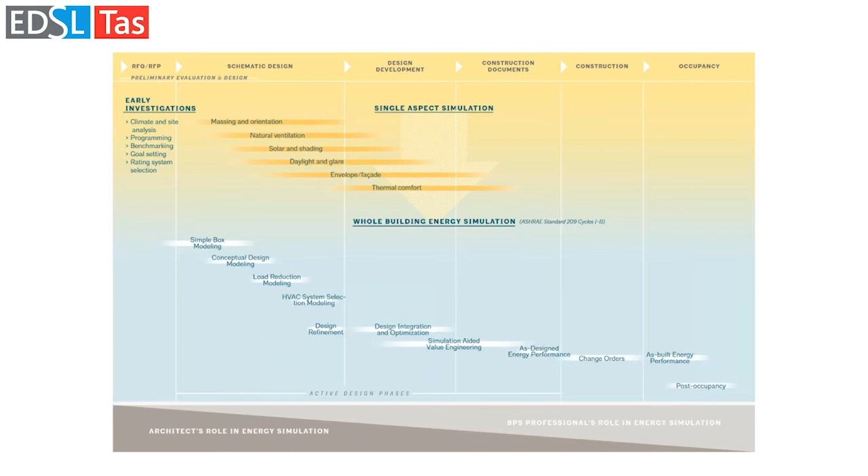But then if you take a look down the bottom, everything that's in blue - this is actually, and you might, if you can read the fine print, great, if you can't, that's okay - but next to the title, Whole Building Energy Simulation, they actually reference the ASHRAE 209 standard. So this graph basically does its best in a nice visual way, thanks to the AIA, to map certain aspects of building energy modeling to different points throughout the design lifecycle.

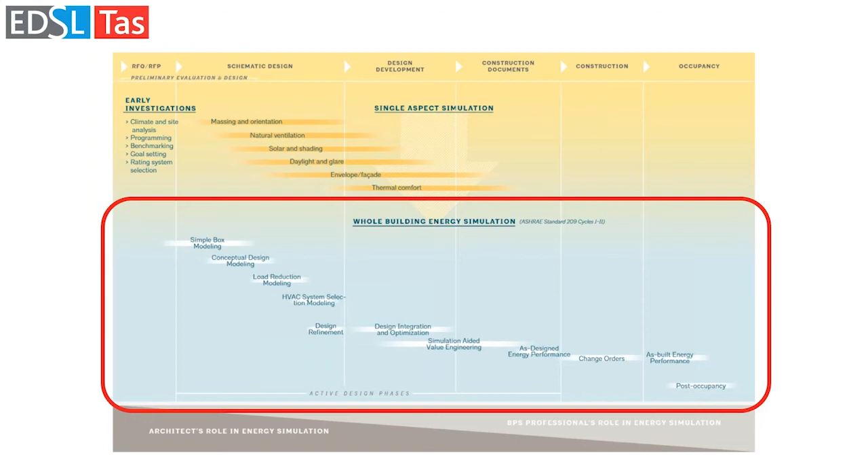So I found this a little difficult to read, so we made a simpler version of this. Hopefully we can just go through it. As you can see, the column on the left takes you down through the design cycles. And then sort of the lighter shade blue are aspects that we'll be talking about as it relates to Tas and how you can accomplish each of those in our software Tas.

So we've got, for conceptual design, or RFP, RFQ, we've got something called simple box modeling, and then conceptual design modeling. Michael will be happy to go through those.

And then in schematic design, load reduction modeling, which is basically where you're trying to find ways and design strategies to reduce the heating or cooling loads or energy loads on the building itself. So if you can prevent the energy from being used in the first place. And then also some very schematic system selections to try to figure out how you might develop your design around different active and passive strategies for the building itself.

Then in design development, much like the architectural cycle, you begin to do the refinement of that design. You begin to sharpen the pencil a little bit, provide a little bit more data, go through some iterations, and then you begin to integrate your systems and optimize, let's say, the sort of the template-based systems to the specific building uses.

In construction documents, the 209 standard calls out for simulation-aided value engineering. So inevitably, someone's going to think something costs too much money and is going to ask to see if substitutions can be made. So there's a section in the standard that covers what sort of energy modeling might be suitable for the value engineering process.

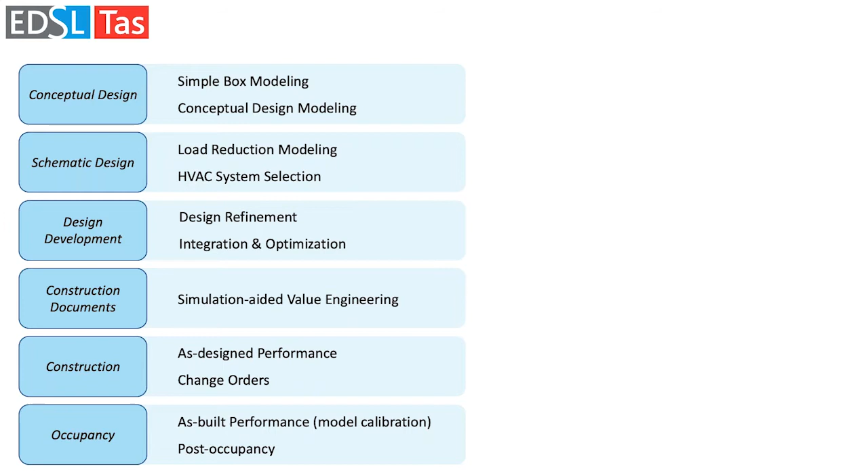So that's a very quick 50,000-foot view of the types of energy analysis that are used throughout the design and occupancy life cycle. And I'm going to hand it over to my colleague, Michael, at this moment, so he can begin to talk about the first phase, conceptual design, and what's required within it. So thank you, Michael.

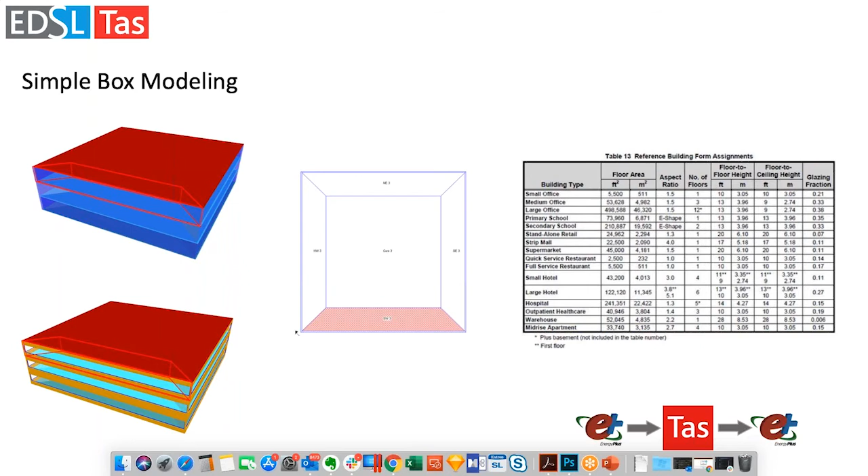So then basically building up into schematic conceptual design, where maybe you don't know the final shape of a building yet, but you know the space types you're going to have to analyze, and you want to see how those exposures, different orientations, perform with different considerations. So this is looking at different sun angles for solar and sunlight exposure, and also daylighting analysis.

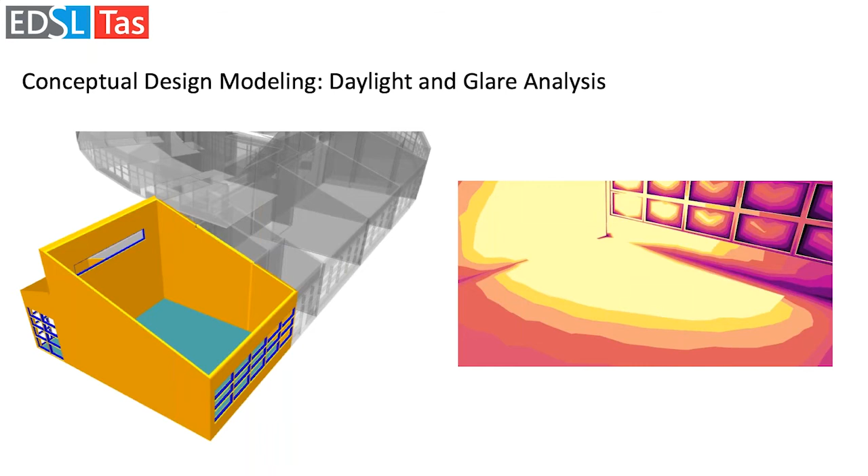Mixed in with natural ventilation, so we have daylight being analyzed for this particular array of windows that have been applied. That could be changed back and forth as you iterate between the daylighting and the impact of different window configurations, different operable windows, maybe having only the top row openable, just playing around with one room in a particular building, moving on from the one zone building in the simple box modeling type analysis.

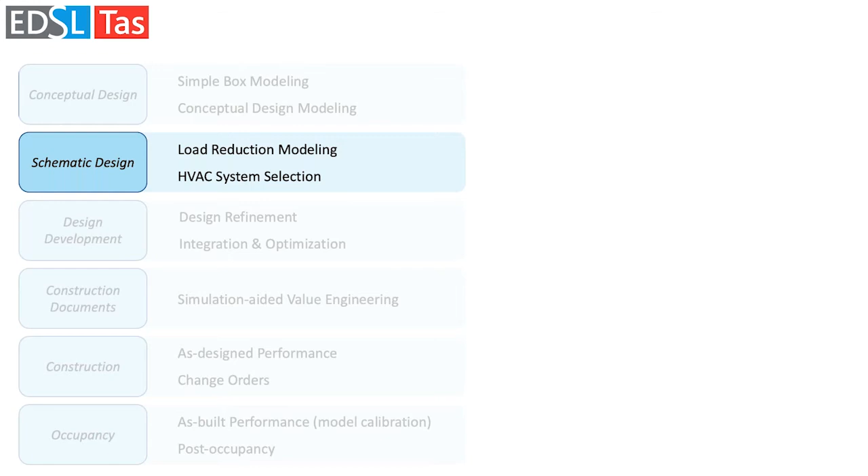So once you get out of the conceptual design phase - and I'm skipping through that quite quick - you would have several iterations going through different ways of analyzing the building, different aspects of it, single aspect, whole building aspects. You may go into load reduction modeling, where you could look at more refined building forms.

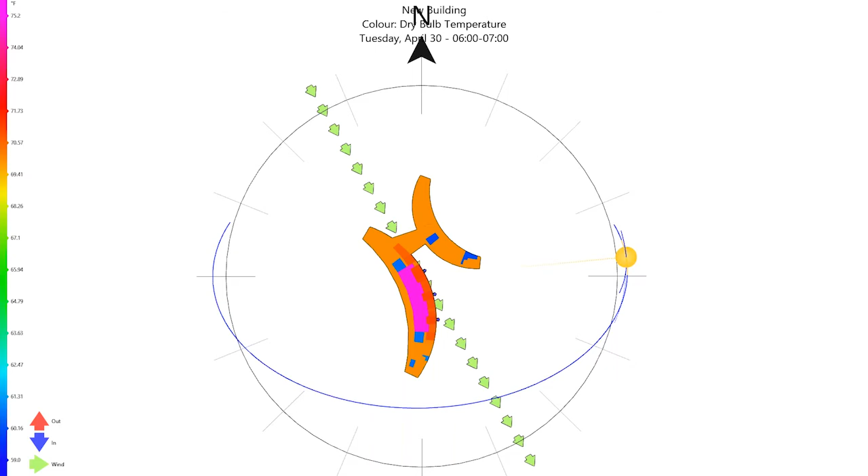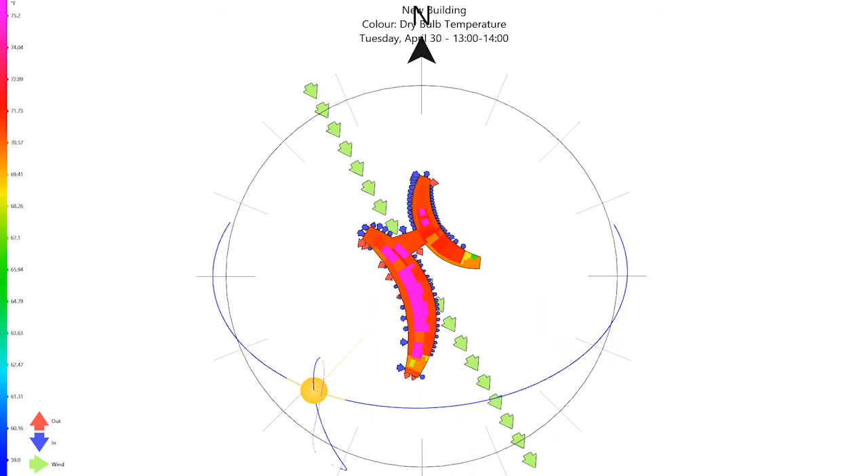This is one story building, all the zones being analyzed, and in this case just for the temperature as it pertains to responding to the natural ventilation. So you see the wind direction changing with the green arrows, and response of all the apertures with the blue arrows of the cold air going in, and the red arrows with the warm air coming out for the building.

Through the course of a typical day. So this type of analysis can be performed at a simple level of detail, building up to more levels of detail in the same type of thing, where you're trying to look at load reduction.

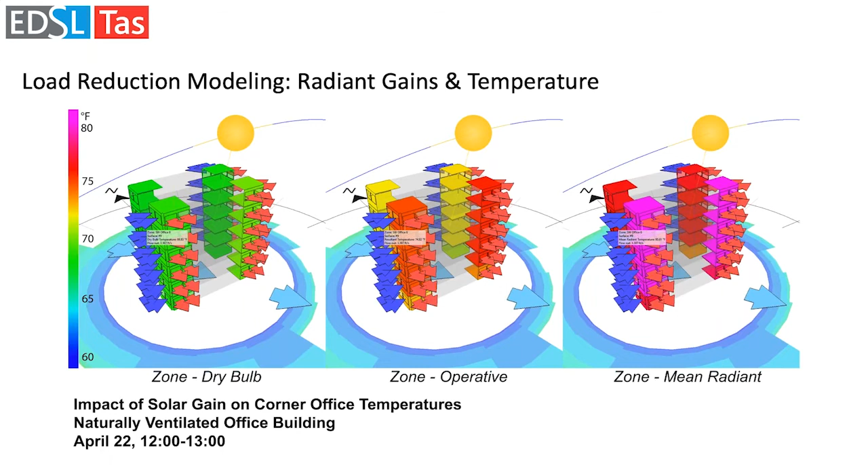So this is just to show maybe natural ventilation schemes are working at one level of detail, but then when we build in a bit more, we find out if we're not considering shading for naturally ventilated spaces, we're still maybe producing uncomfortable spaces. And again, all this is just doing passive analysis at schematic design. And when you've defined shading schemes for your building that work for solar and natural ventilation, then you consider the internal light implications of that.

So there's some ray tracing simulations that are possible in TAS to do these interior shadow simulations.

Building up to larger projects, but maybe just a typical floor, changing glass types for the facade impacts what's on the lower right-hand side. You can basically see the solar gain through the year hourly, and you can see one glass is controlling the solar very much, the other one's letting a ton in. That impact is yes, the cooling goes up in the summer, the heating goes down in the winter, and the central one is the sensible load - heating's above the zero, the zero's here, and cooling is below zero. You can see there's a much larger cooling amount from the higher solar gain.

However, with natural ventilation being allowed to use in the occupied apartments, you're also increasing the amount of hours where zero heating or cooling is needed in the periods before and after summer. This particular project being in Toronto, it was cold - a cold climate anyway, and the system for cooling efficiencies were much better than the heating, so it can balance out.

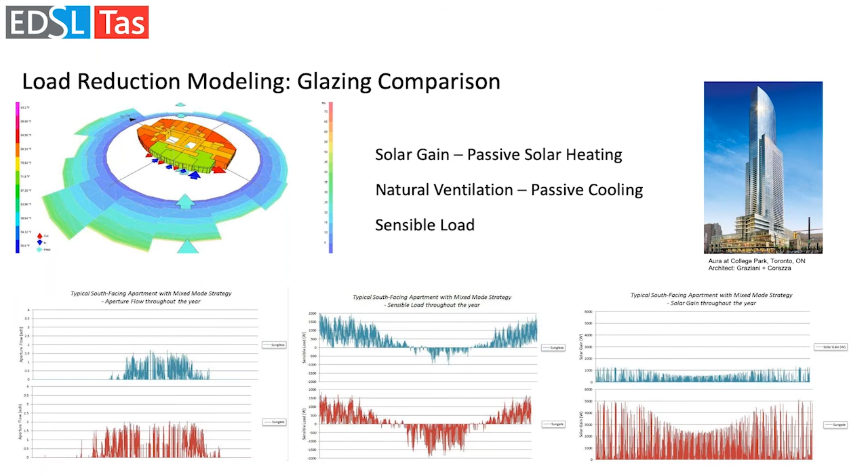But again, this is as you're working through the design options for a project, analyzing how you can reduce those loads. Another thing after doing early concept daylighting model analysis is being able to integrate that into lighting controls, so doing daylight dimming. You can see here, this is the interior lighting load for this office - the weekends are the gaps - and you can see how that dips down for all the zones in the building at different levels through the year with that daylighting control.

And it saves - basically this block would be filled in without the dimming control - and that reduces the internal heat in the space, which allows then some more hours where you're going to hit zero sensible load, so no heating or cooling required, as shown in this little area here, zoomed in.

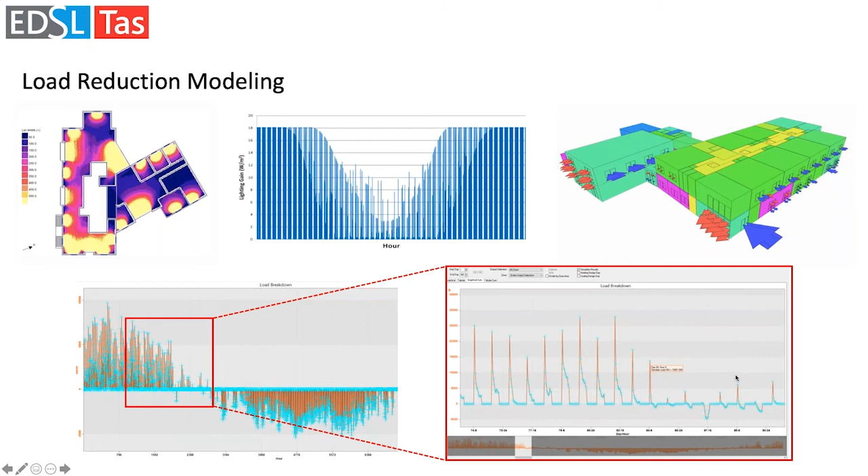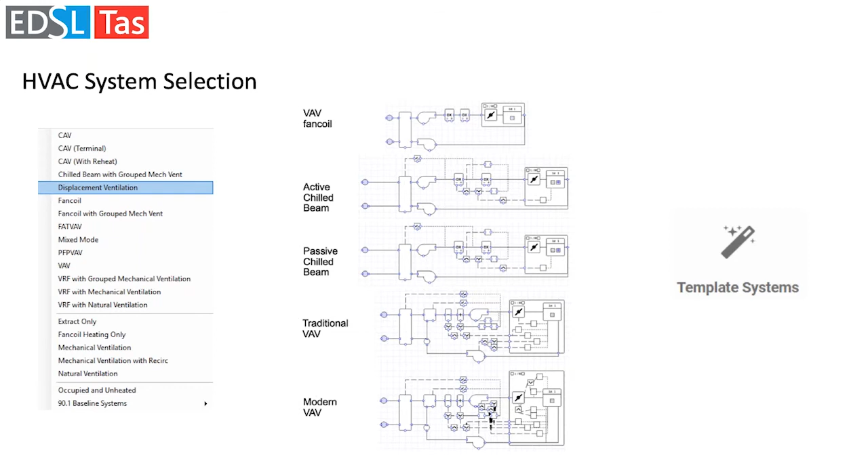The next part in this modeling cycle focuses on basically templatized HVAC system selection. So you're not really drilling down into all the setup of those - you're using typical setups, but maybe changing out different types of systems to analyze. There's a bunch of templates in TAS that you can pick from, shown on the left, and all of the baseline systems from 90.1. The idea is you just pick the type of system, apply it to a certain subset of thermal zones in your model, run it, see how it performs, and compare that to other systems analyzed.

As we move to the next cycle in design development - design refinement, integration, and optimization - here there's more of a solid idea of the geometry and shape of the building, but you're really just refining all the parts and pieces that make up the geometry further, when you've taken those smaller concept models and applying them at a larger scale in the model.

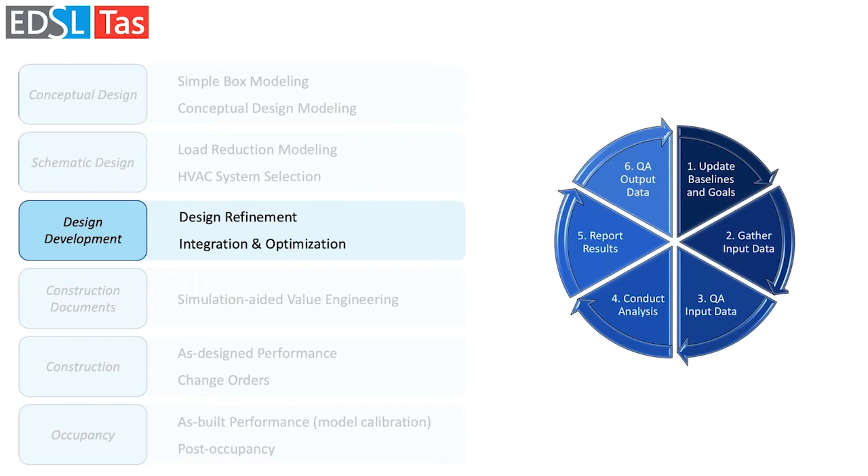Here moving to show one floor plan from that building being analyzed instead of just a couple of rooms for daylight, moving up to a climate-based daylight modeling approach where multiple hours through the year are analyzed. We do analyze the whole year when we do CBDM analysis, and in this case we even reduce the grid spacing to 10 centimeters, or a third of a foot square - much less than is needed for LEED - just to get a super granular grid to see what was going on, and also to test the software out for its performance. But again, this is just so you can review that in the context of an entire floor for the project.

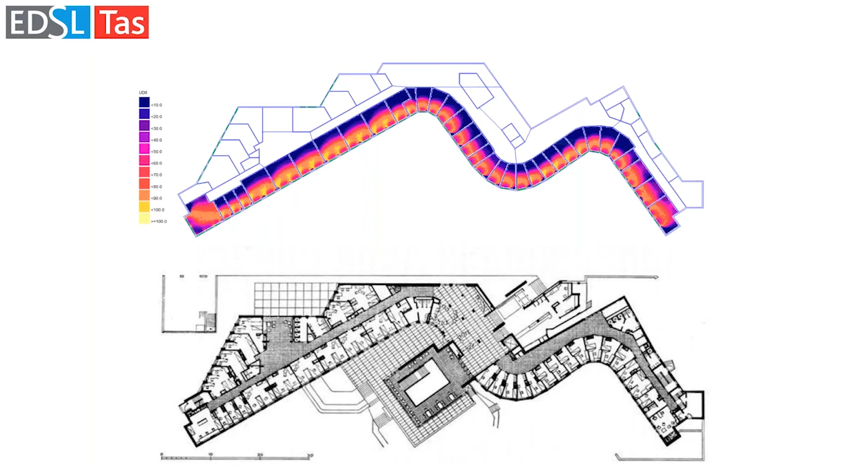Annual insolation, so looking at the solar gains on the whole building form - in this case just selecting those dorm rooms, the same ones that were analyzed for daylighting - picking a subset of the spaces to test how the shape of the building is impacted by solar, and then seeing the convex piece, the part pointing towards the sun, how that's getting hit. You can basically in TAS mouse over any of these surfaces and get the data reported back for the actual annual insolation for that surface. So it's interrogatable data.

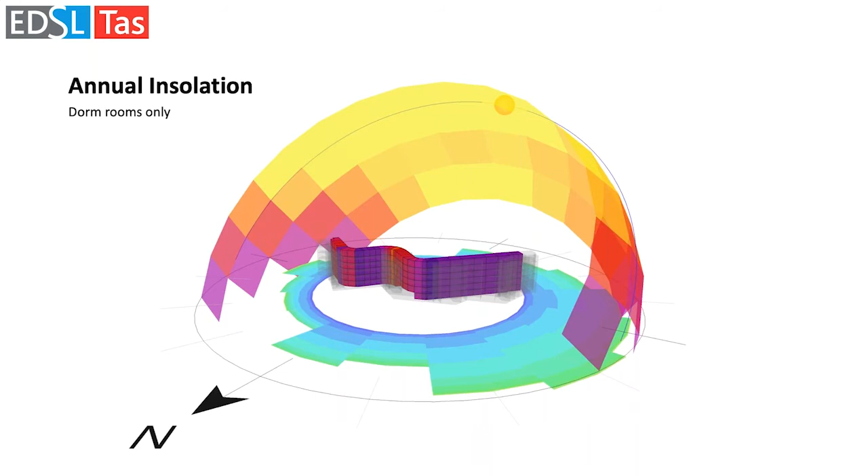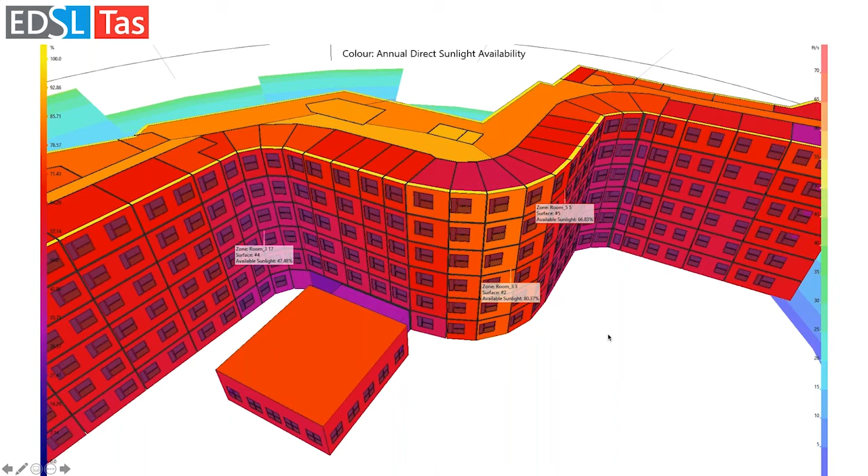And again, taking natural ventilation as a concept of analysis, applying it to the whole model could be useful, but also before doing that, maybe picking a subset of rooms to analyze different orientations for natural ventilation, to check how it works at different times of day and different times of year. So this is looking at 27th of April, 9 a.m. and 1 p.m. In the morning, it actually still maintains comfortable temperatures for these different orientations, but by noon, when the sun's really up, the high exposure bit with solar and annual insolation was very high, is basically too hot. There's no air conditioning in these rooms in this particular building that was finished - they'd had to put HVAC units on it if the students in this building were still there by 1 o'clock, if people recognize it.

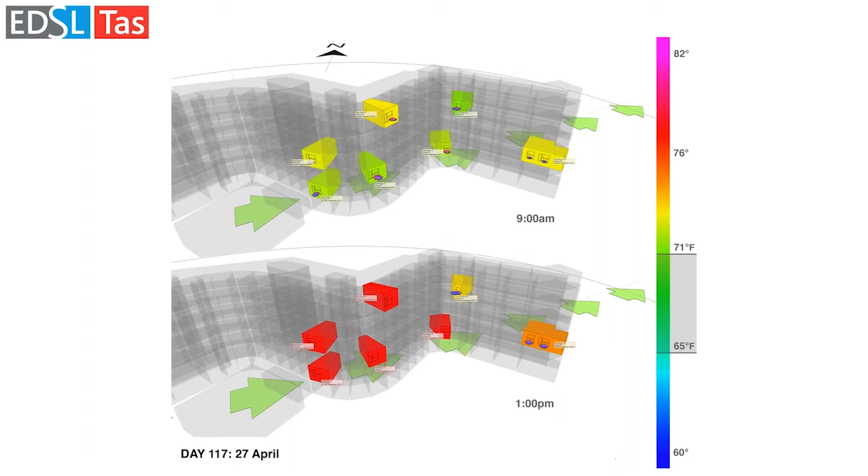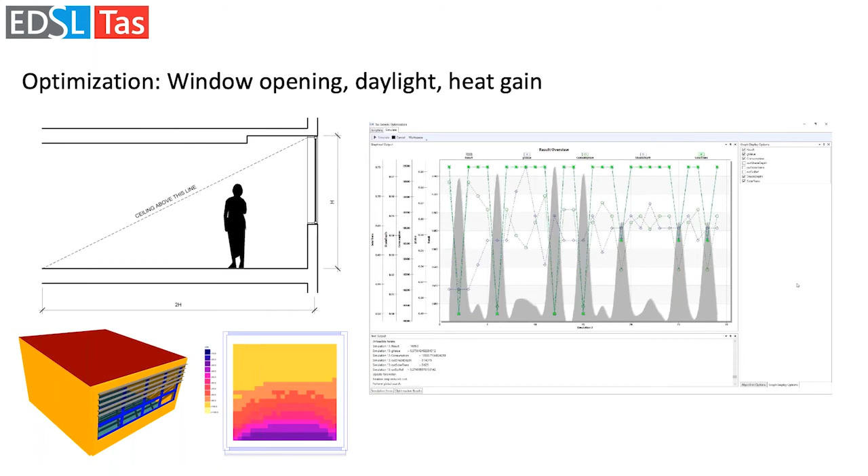After doing that, just analyzing things, optimizing. So when you can't find a clear solution for many things in building simulation, because lots of variables overlap and result in different outcomes, optimization can help when you want to basically take a few things like shading and daylighting, calculate maximizing daylight availability, minimizing peak cooling load, and this is basically running a series of options.

You see that the gray shaded area is the result of this analysis, and the idea is to minimize that down to as small an impact as possible. And you can see basically it starts changing variably through the first half of the analysis, and then it kind of settles down into a particular result space.

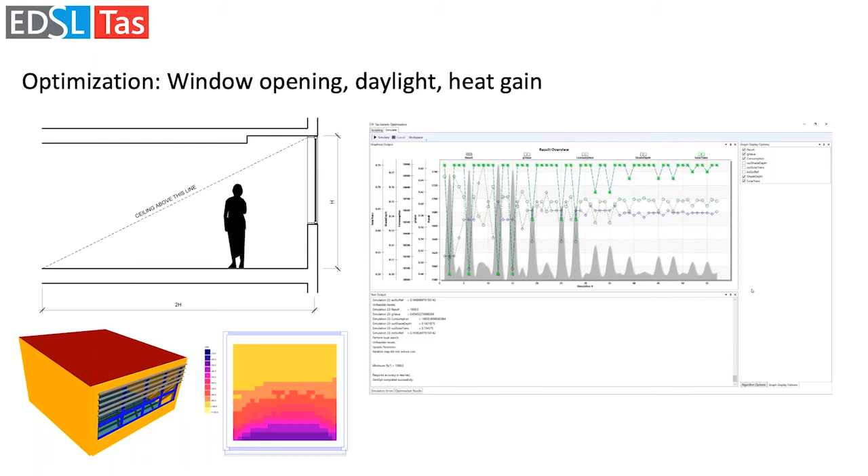And there's a series of algorithms available in our optimization piece that came from LBNL's GenOpt tool that we basically created a C# scripting interface for in TAS that allows you to run these generic optimization and parametric analysis types with. So we looked earlier at that dry bulb versus mean radiant temperature and operative temperature with the passive side of things, with natural ventilation, solar, and potentially solar shading.

You can also analyze active radiant options in TAS. So here's modeling of an underfloor heating and cooling system. And once you do this, you could, just like the NatVent, spot check a few rooms before applying it to the whole building to see how that performs as you're doing the design. So here we could check things like the surface temperature of the floor, as well as the air temperature.

So floor surface temperature is labeled up here, the air temperature dry bulb here, and the operative temperature of what the occupant feels down here. So you can see the underfloor cooling is actually bringing the temperature felt by the occupants much lower, and then potentially using less energy to do so.

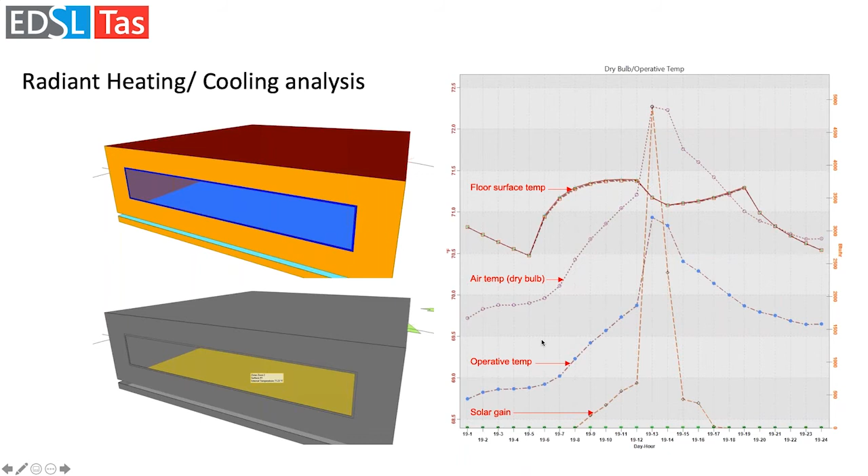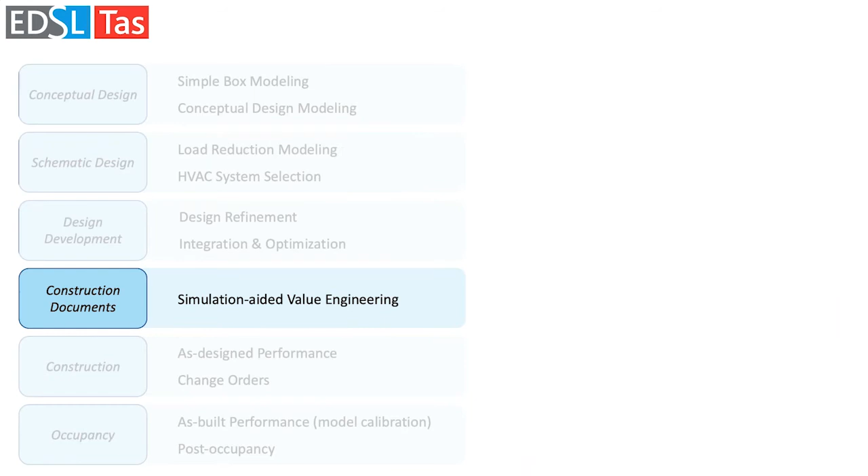This goes into the murky area of simulation aided value engineering, where something costs too much, so we're going to make some changes. But the 209 book, the simplified version, asks you to assess the implications of those changes through modeling. So say you spec a particular mechanical system for a building, and it was considered too expensive, so you could change it out.

So here, the generic systems were analyzed, passive and active beam. Maybe one of the systems came up too expensive, but by picking something more specific and running that analysis, you could see the impact was going to be more cost effective in the upfront cost of the system, but also maybe saving some energy overall. And again, this is comparing those template systems with more refined detail as we get into the completed project design documentation.

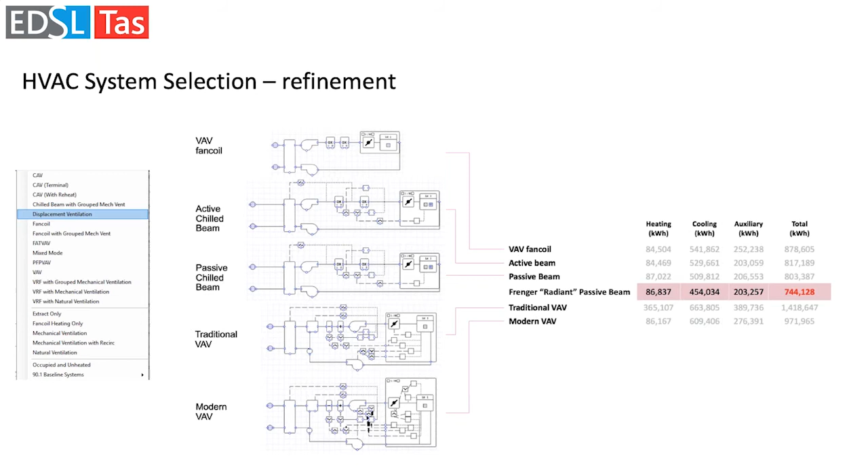As you get into construction as design performance, the piece I'm going to highlight here is actually to do with 90.1, as Bob alluded to earlier. I'm going to talk about this for a little bit. ASHRAE 90.1 Appendix G is a compliance path for the standard from 2016 onwards, and has always been part of LEED as well. And since 2007, we've had a studio that's been added to over the years to automate the process.

Basically, this means that we take the proposed as-design model files and generate all the baselines. That can be the geometry files, the simulation files, and the HVAC files to do all the simulations for you. So you end up with all the model data and the average baseline against proposed results all created for you.

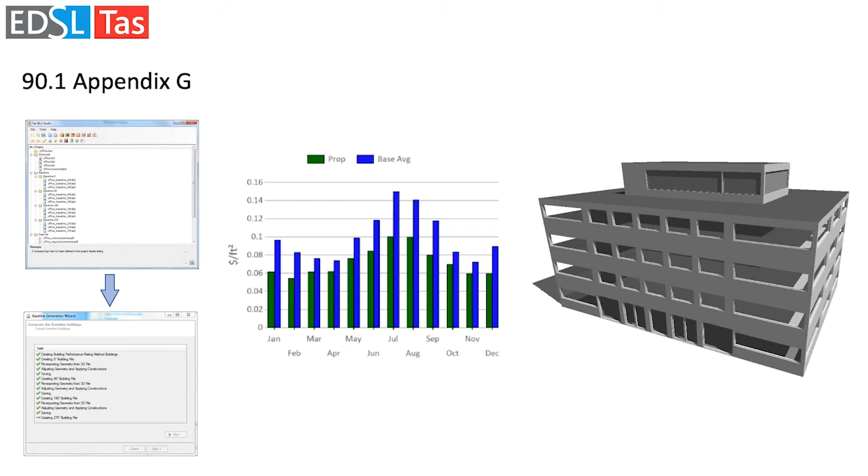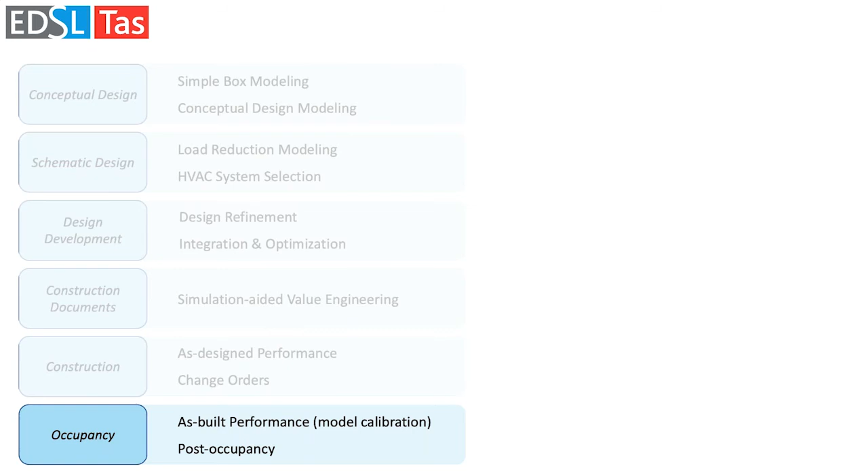And then moving on from that into the post-occupancy and model calibration phase for the as-built. So reassessing what the commissioned building space ended up being. If there were any change orders not assessed or value engineered, this is where you can go back and reassess the as-built performance.

This example I have to run through goes a little beyond what's needed in the standard because it was a research project, which meant that it got access to more data than you would ever typically get on a project, such as the ability to not just use a more up-to-date weather file for the location, but actually install a weather station on the roof of the project and record the weather data for 2 years and use that to drive the analysis.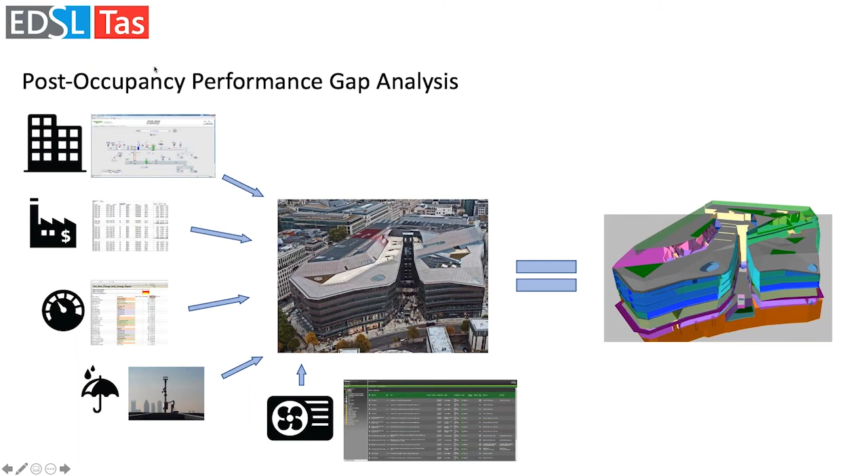Having manufacturer's equipment data available for all of the equipment installed and putting that into the model, getting sub-metering data for the spaces, full access to the utility bills, and even the BAS system, BMS systems, and all the data from sensors as the building was under operation, to basically create a calibrated energy model to do the post-occupancy performance gap analysis.

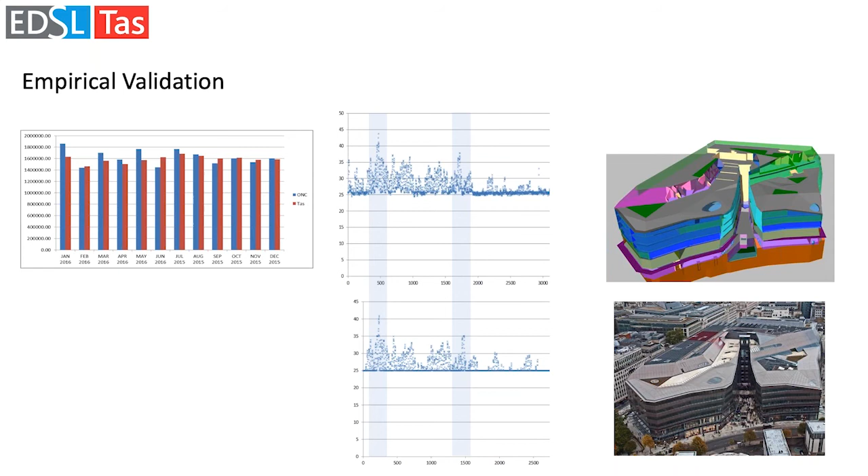There was a series of measures implemented on this project that led to many savings. It was 150,000, I believe, a year saved on the project every year afterwards. And also part of that was actually just improving comfort of the 4 stories of office spaces that make up the top of the building with regards to humidity controls in the space.

Another part of post-occupancy goes into equipment replacement and feasibility for retrofits. So in New York City, there's Local Law 97, which is going to start having people report their CO2 emissions. So there'll be many more of these projects popping up. This is just an example of taking one example building with measured data, creating a calibrated model to that, not as much detail as the past example.

So it's calibrated as much as we can with the data available, and then basically making changes to the mechanical system, updating that, knowing the upfront cost to make that change, and trying to see what the predicted savings could be for that new system to see if it's worthwhile to do, to get them on track for where they need to go for the law as it progresses through the next 10 or 15 years.

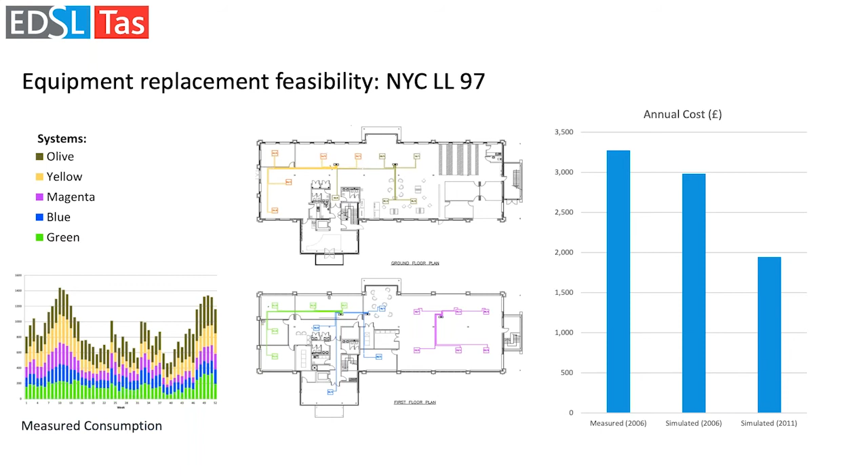Okay, so that was a brief bit about some of the cycles, some of the levels of detail in the cycles, and different types of analysis that you can do. Definitely not exhaustive, but I want to get into a little bit about TAS itself with some of the time we have. So what does it do? All the things that we've shown previously in the slides: whole building simulation, daylighting, natural ventilation, load calculations, HVAC sizing, and those 4 sub-categories all fit into whole building simulation as well.

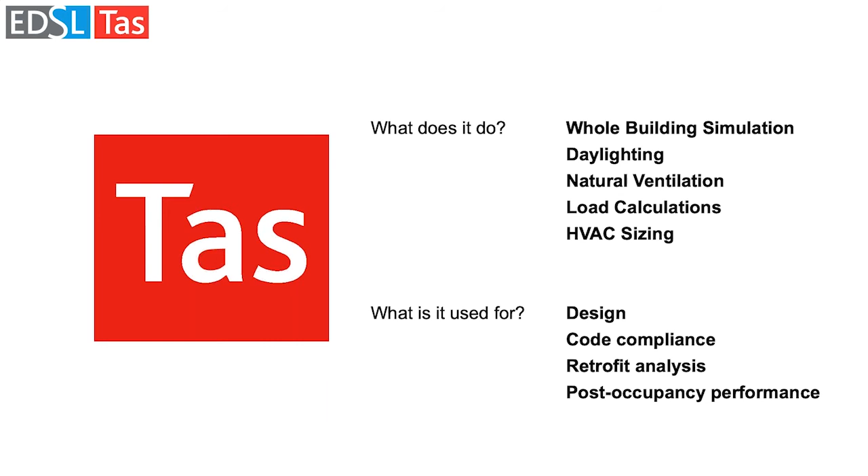What is it used for? Anything from design, analysis, code compliance, retrofit, and post-occupancy performance. So the full spectrum of the building's life cycle. TAS can be used to meet building simulation for those phases.

So how is TAS constructed? This is the typical workflow in TAS. You have a 3D model application that allows geometry creation and daylighting analysis to be performed. So all of the daylighting graphics shown previously came from our 3D modeling application. That also does shading calculations, which can be distributed among multiple cores and multiple machines. So you can basically create a little swarm of machines to do shading calculations to speed that up.

The building simulator allows you to put all the rest of the building input information, occupancy profiles, the lighting controls, aperture types for natural ventilation, all the passive simulation and shading options get put into here. You basically simulate the building loads, and then that goes into the results viewer where you get to review that data in a lightweight results viewer program,

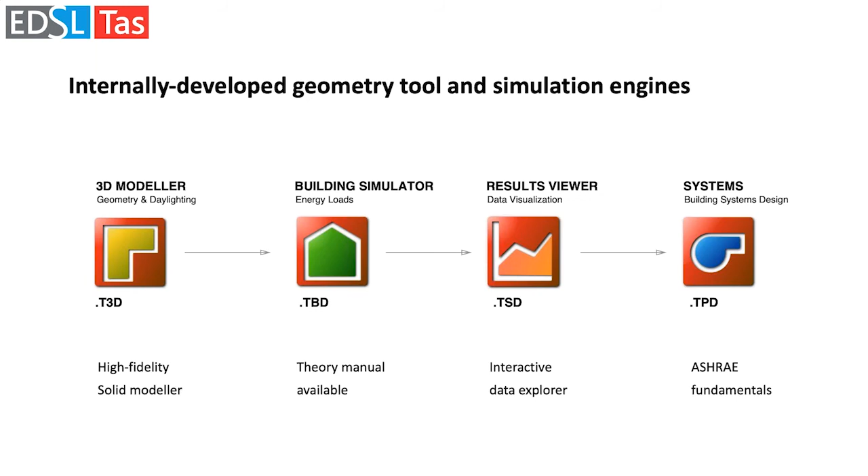which in turn feeds into the HVAC program where you get to use those template HVAC schematics, or even customize your own and build up as it's component based. You can build up schematics for whatever you would like on the air side and the water side, or refrigerants, VRF, and customize that as needed to do the HVAC whole building simulation to calculate the overall energy, EUIs, cost, and CO2 emissions for the building.

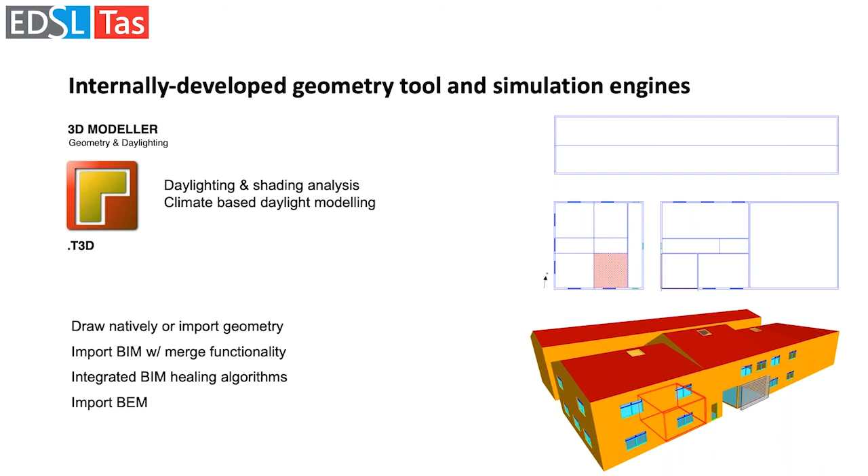So 3D modeler, you can draw or import geometry. Has import and merge functionality with BIM, so you can import a file once and then import a second file that's been updated and retain changes that you've made, but also update any additions that have happened. And there's ways to import BEM files as well.

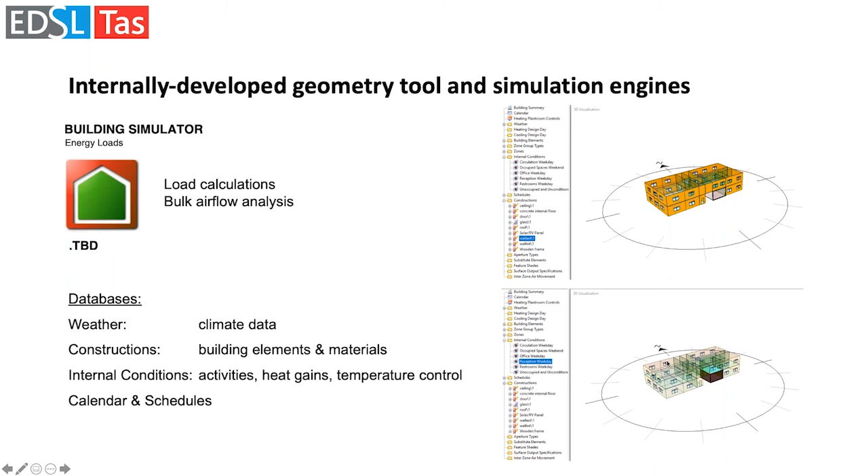Activities, so defining how many people are in an office space versus how many people are in a corridor, and again, these are the activities that are set up in the building simulation. When you select those, you can also see where they've been applied in the model at the same time.

TAS systems allows you to build up schematics for the plant room and the airside by component, or using those templates. So again, here's like a template fan coil system. It has live data that you can see on the schematic as well as psychrometric chart data, and there's data behind every single component. Every pipe and duct has all the 8,760 values for all the variables that it stores available.

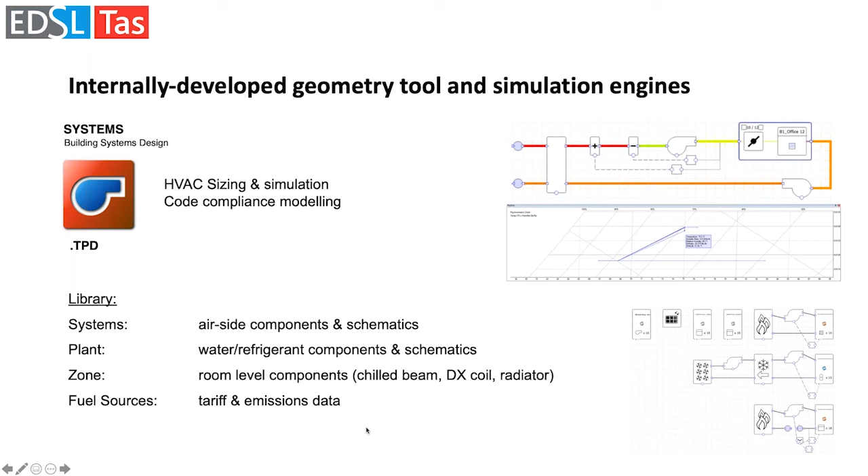And all these parts and pieces can be saved and reused in other projects into a library of things, as well as creating new fuel sources. We have a bunch of templates in there as well for those. You can create new fuel sources with new CO2 emissions factors and all the data necessary to define the tariff situation for the project.

So flexible workflows with Tas. Tas is a standalone application that, as you go through that typical workflow, can meet the needs of most projects. But it's not always the whole part of anyone's story. There's always something that goes on before and something that goes on afterwards.

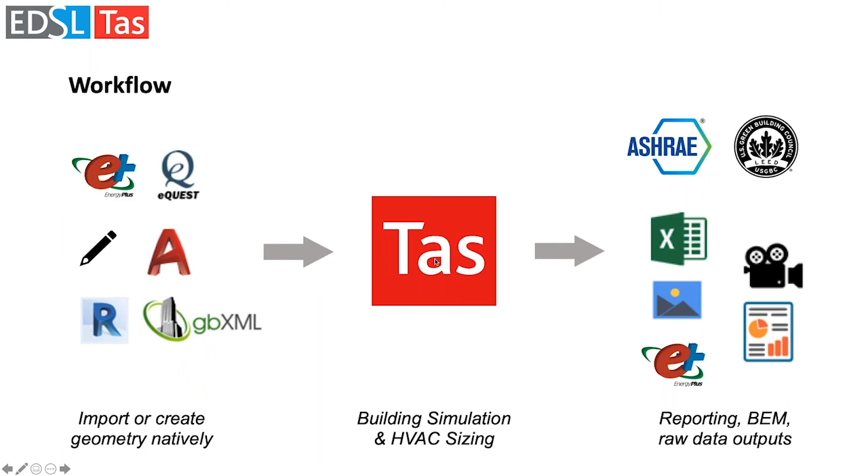There's lots of ways of getting data in and out, whether that's from just tracing CAD files to create the geometry, importing gbXML from Revit or ArchiCAD or any other gbXML authoring tool. There's ways into Tas, and then ways out. Always get Excel data in or out of Tas, video animations, images, customized and template reports. And we also have a BEM interoperability link with EnergyPlus. You can see EnergyPlus data going in and out. And we also take eQuest data in as well.

So with interoperability, I touched on it at the start. It does allow the ability to read and write EnergyPlus data from Tas, which can help communication gaps across teams. And also just exploring options within Tas in an environment set up to be able to get to whatever level of fidelity of information you want, and then be able to create the IDF file and pass that back, whether it's the architect communicating with the engineer or the other way around.

So Tas, we do love Excel, so there's ways not only to copy and paste data to and from Excel, which you'd expect, but you can drive Tas with Excel macros, which I'll touch on very shortly. The idea in Tas, though, is that behind every piece of data in the model, all the raw data is available to get out.

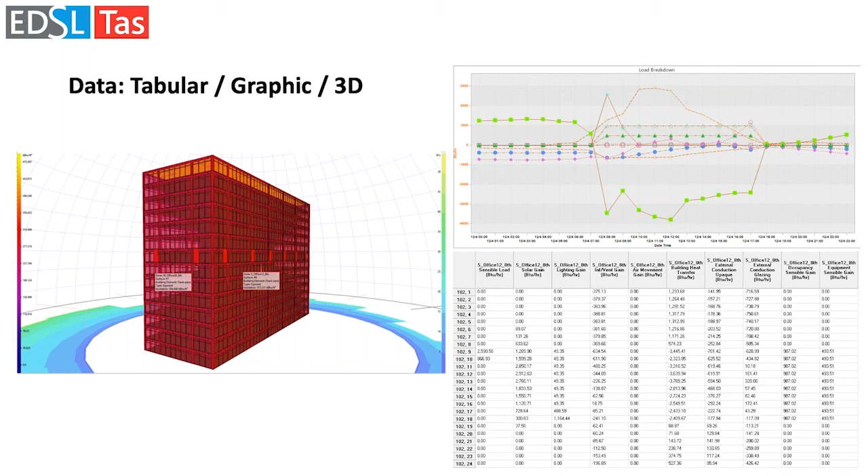You can graph it and configure this graph to show different subsets of the model, different variables. You can also project that onto the geometry to help explain the data that's in the project to different audiences, and also to graphically review the information yourself. So you can quickly check what's going on with the building for different types of things, whether it's the air movement between spaces, or daylight or whatever. It's all in tabular, graphical, or 3D format.

So it is extensible, as I mentioned. So with Excel, you can write VBA scripts to automate either the creation of files, modification of files, simulation, or extracting results. And you can do the same thing with VB.NET and C#, with C# being used in Tas GenOpt for the optimization of parametric analysis.

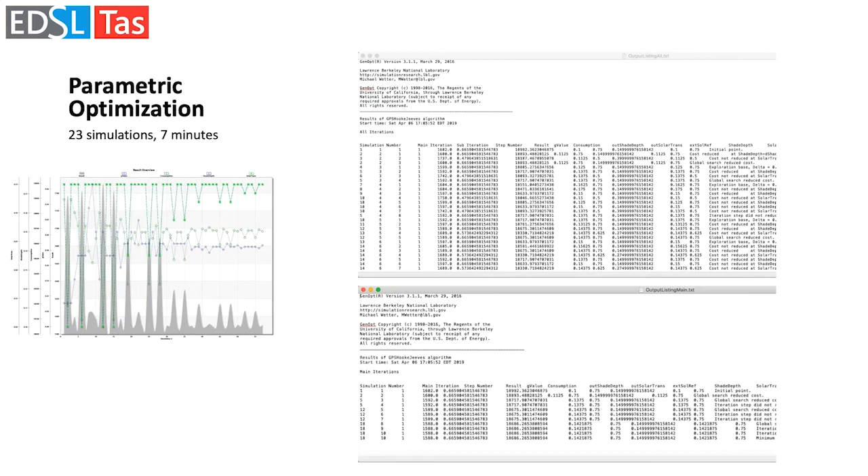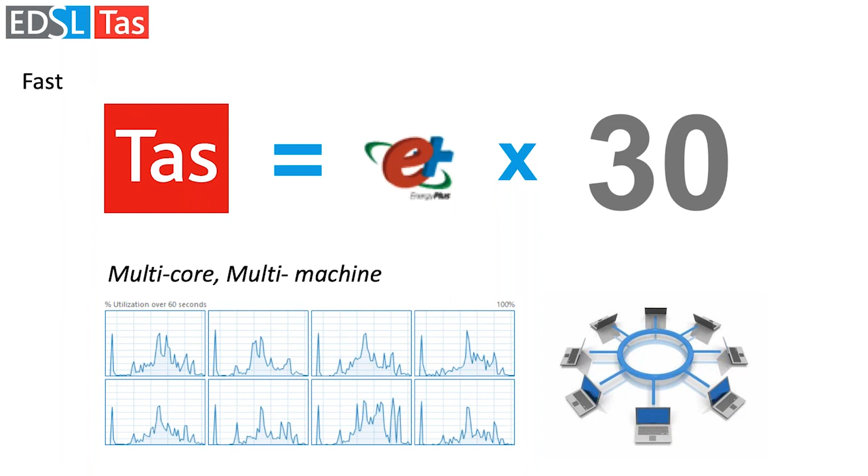It's multi-core enabled for all building simulation, and multi-machine, as I mentioned, for the shading calculations and for climate-based daylight modeling. So you can link together not only multiple cores on one machine, but multiple cores across multiple machines for even increased speed when you need to crank something up overnight to finish.

Okay, moving to the last little bit here, we do have a new release of Tas that's just come out, Tas 9.5. This represents a big move forward in technology as it has migrated to a full 64-bit application, which has basically produced a bunch of benefits, such as the daylighting example I showed for climate-based daylight modeling for an entire floor. That model, I said, with a grid space of 1/3 of a foot for an entire floor, took about 17 hours overnight. Perhaps daylighting models for 1 or 2 zones may take just that long with a larger grid

space and current tools. Whereas with the 64-bit version, we're now not limited in the memory for the amount of spaces you can analyze at the same time. And so with chained machines, we could potentially run the whole building at the small grid spacing overnight. So again, if you're thinking about just doing single zone analysis, you can do those in seconds to minutes, not minutes, hours, and potentially days as in other tools.

Expanded and flexible licensing options, including some network licensing options now. A bunch of extra repetitive task automation processes developed for 90.1, load calcs, and LEED. More interoperability workflow improvements: the E+ import now creates a fully editable 3D geometry file, so you can edit the geometry, and some extra improvements to the UI of the product, which we're continuing to improve on.

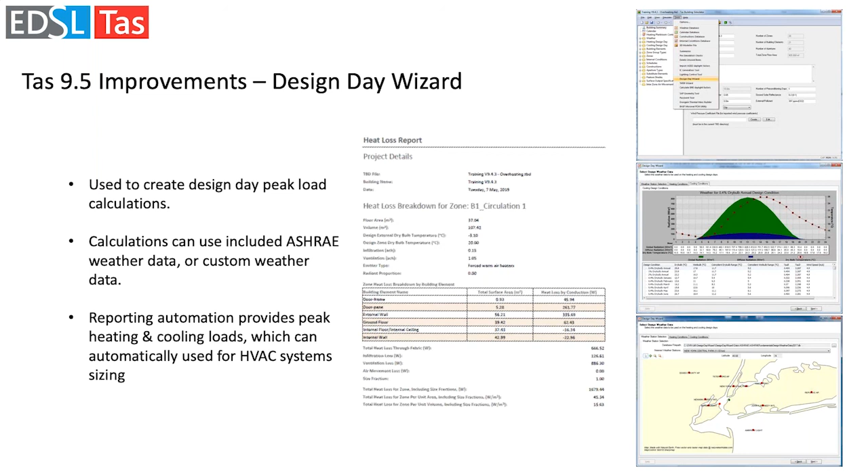Those can be run when you're doing the first initial load reduction analysis, and also later on when you're doing the full building HVAC analysis. The same design conditions can be used and reused. There's some improvements we made to the LEED process, which includes updates to the 90.1 Studio for Appendix G, automating the baselines and all the efficiencies for that.

But we've also extracted all of the baseline data, or most of the baseline data, into the minimum energy performance calculator spreadsheet that's required to submit to LEED for review. So basically, once you get to the end of the Studio project and you've calculated the results, there's now a push button within Excel to extract the data into the spreadsheet to help.

If you ever have to make iterations on your model, you don't have to then spend hours typing out all the information again into the LEED spreadsheet before resubmitting it. There's just a push button to pull that data. And we're going to keep improving on the amount of data we pull out and into that spreadsheet. We also have automated daylight credit analysis and reports for LEED as well. So there's another part where we're helping with productivity.

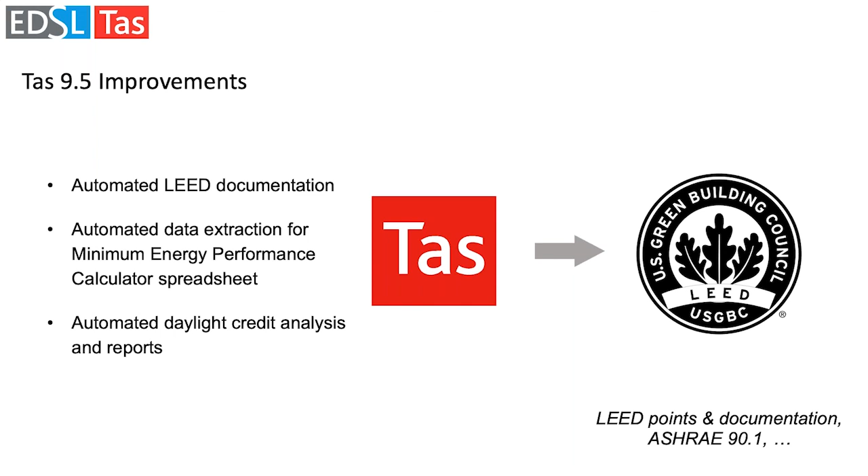So Tas is one tool that covers building simulation and sizing. It does help to minimize rework and data loss across applications and platforms, and provides better communication across teams and data exchange, so you don't have to recalculate things. It lessens the communication gap across those teams.

And with all the productivity and automated tasks, it does produce time savings. Coupled with the fast speed of Tas, you can get much more QA and QC work done in the same time you would take to do one run. You could have done 7 and analyzed them all.

One final note, some of the learning notes from the software: Tas is free to learn. There's a video-based online course that has all the core applications and chapters that take you through steps of learning the fundamentals of how to use Tas, as well as a specific course to do 90.1 analysis. We also have workbook-based courses that you can download and follow along.

If you want to watch videos, you have those. If you have the workbooks, you have those too. The online video course also has a bunch of example files. You can download the files at any point during the training, so you basically get different levels, different ways into the training, and practice one extra piece instead of having to start from the start every single time.